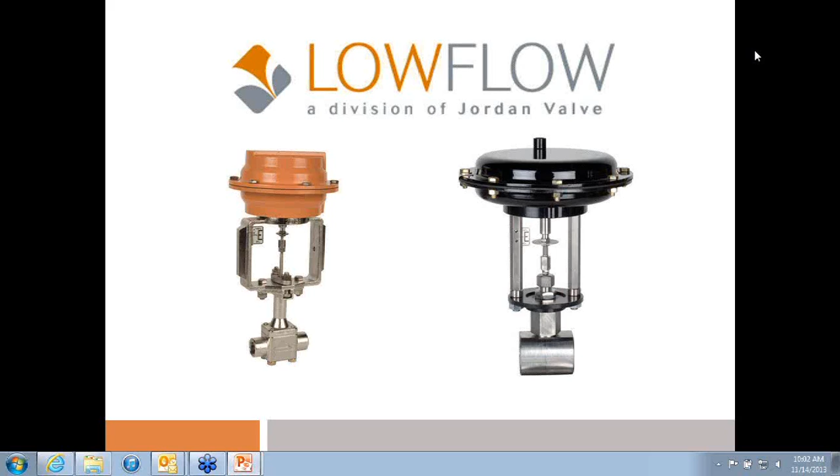Introduction to Control Valves for Low Flow Applications. Today's presenter is Tim Gaynor, Regional Sales Manager, and Harry Wepkenberg, Product Manager for Richards Industries, which owns Low Flow Control Valves. Their other brands include Jordan Valves, Marwin Valves, Hex Valves, SteriFlow, and Bestobell Steam Traps.

Tim has 19 years of experience in the industry, 16 of those years with Richards Industries companies. Harry joined Richards in 2008 and has been in the valve industry since 2002.

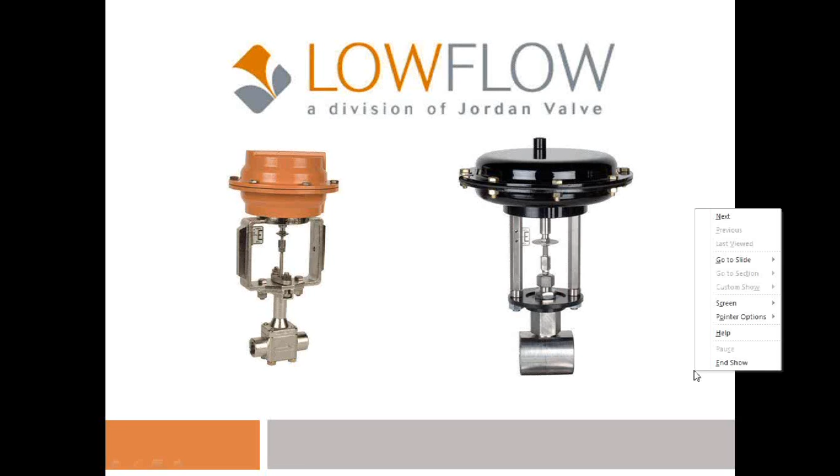Just quickly, we want to go over a few different things, all of it pertaining to fractional or low-flow controls. On the agenda, fractional flow scope, kind of want to define the marketplace, and then we'll lead into some prevalent applications that we see. And that'll include a pretty diverse group of industries, and hopefully there'll be applications that are pertinent to each and every one of you.

And then we'll go into some of the typical control valve design options that are out there in the market. And then we'll talk about some sizing and selection considerations that might help you out for these applications. And then we'll go a little bit beyond control valves and talk about some other products that may be applicable. And then lastly, we'll just offer some valve selection tips.

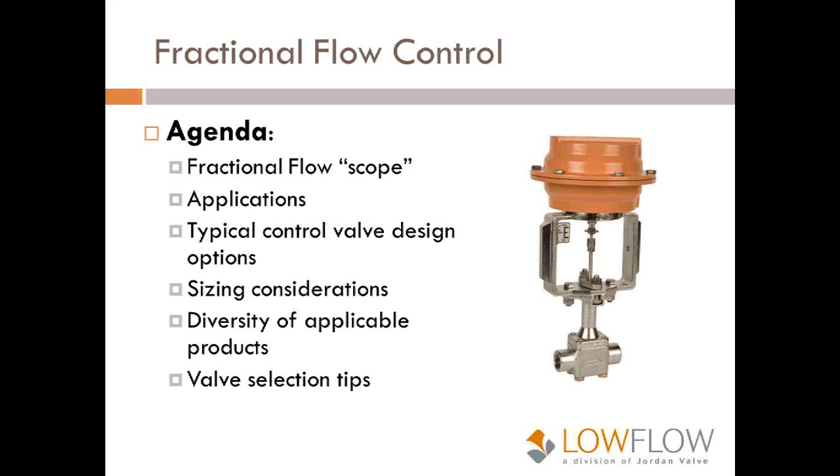Application scope, what we see as being the commonality or common denominator with all these is a small volume of some kind of product, liquid, gas, whatever it might be, that is being controlled, and the control requirements are for a high level of accuracy. And that's probably the most generic definition that I can give. And that may conjure up specific images, small products, pretty mundane applications. But within that scope, there's a lot of variety.

For instance, if you look at temperatures, we see applications that run from cryogenic to temperatures over 1,000 degrees. And then within pressure, we see applications that are from vacuum to over 10,000 psi. And then the actual valves themselves, you can have your basic steels and stainless steels, but we see a lot of applications that require exotic alloys, whether it's due to chemical compatibilities or temperatures as listed above. So definitely some common things there with small amounts of flow, but there's certainly a lot of different applications within that definition.

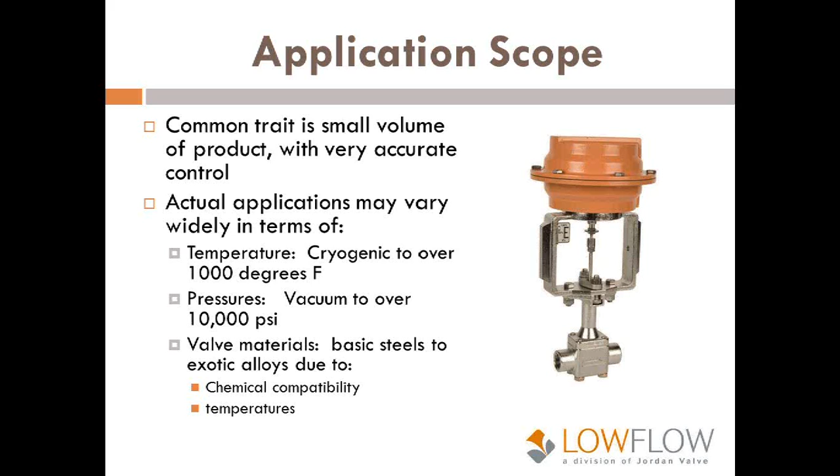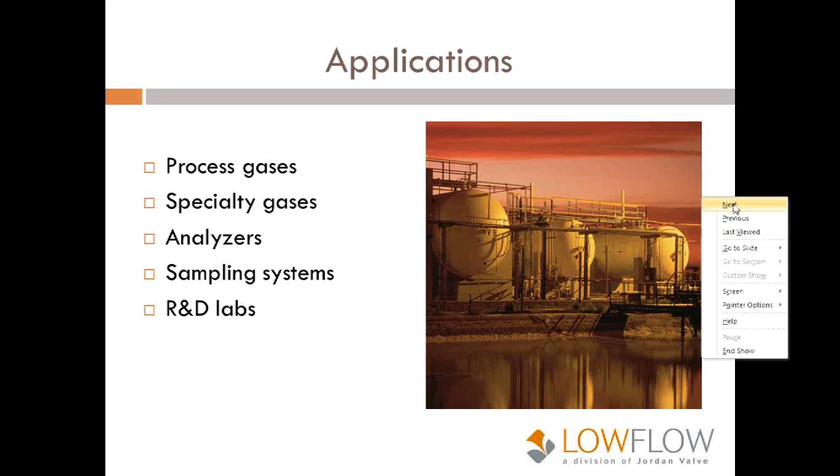First, I'm going to talk about some generic applications that we see, and we'll see this across a variety of industries. A lot of process and specialty gas applications, a lot of analyzer applications, a lot of sampling systems, R&D labs, that type of thing. And I want to segue that into some specifics. A couple of big markets that we see are pilot plants. A lot of the business that ourselves and other manufacturers see revolve around pilot plants.

And these can range from just a small skid, as many of you have no doubt seen, all the way up to multi-room, depending on what they're trying to do. And what these typically have in common is you've got an existing process that a client wants to improve, or you have a new process idea and you want to validate that. The idea here is to build a small-scale version, prove that technology or validate that improvement, and then scale it up to large scale. So you save a lot of money by going with the pilot plant. And this is where your smaller valves, your lower flows come into play. Within the pilot plants, we see a lot of applications for acid injection, chemical dosing, and general metering.

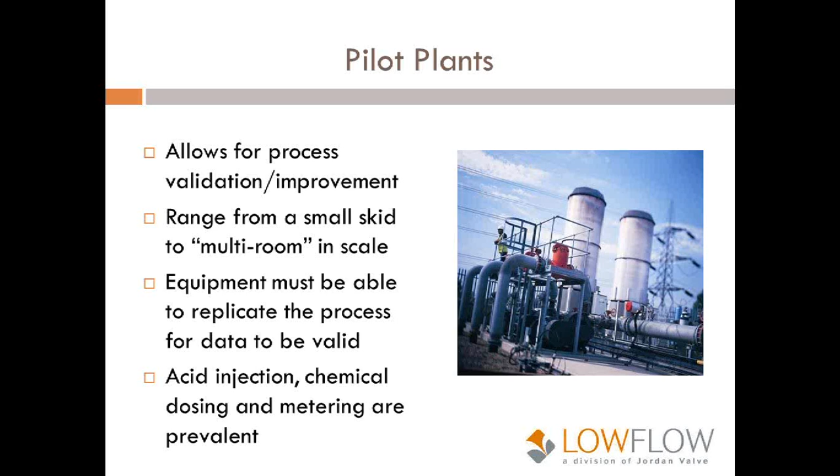Another very prevalent industry is water treatment. This can be water treatment or wastewater treatment, and this can be standalone actual water treatment plants. But we also see a lot of these applications at refineries or chemical plants where they do their own water treatment, even if it's just to treat water before it goes to drain.

A lot of the applications we see revolve around pH control. We see a lot of sulfuric acid applications, typically requiring Alloy 20 material. We see a lot of caustics. We see sodium hypochlorites, usually you'll see Hastelloy C, and that's disinfectant, so that's going to be on the water treatment side.

But one thing of note that we see in these industries is a lot of the configurations have electric actuators as opposed to pneumatics, and that's just driven by the fact that a lot of these plants or treatment facilities are pretty big, and so they don't necessarily have air at their disposal to power pneumatic valves.

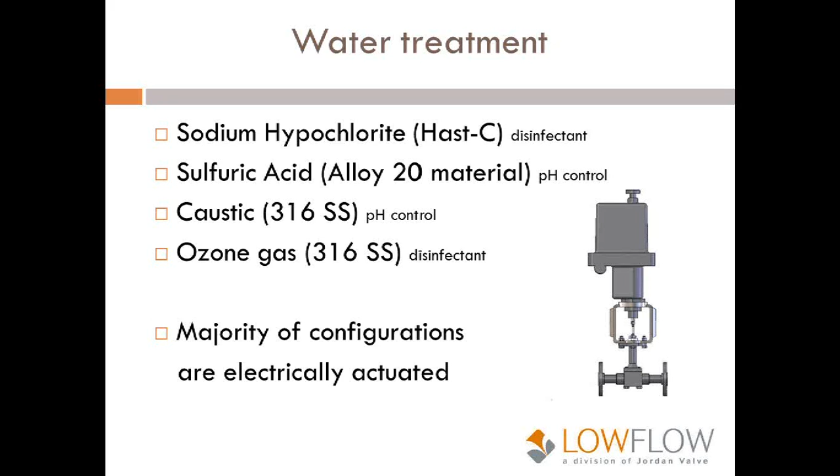Some of the other applications, and the idea here on this slide and the next one is to cover a lot of different technologies, a lot of different manufacturing and process applications, so that hopefully something will make sense to each of the attendees. We do a lot of corrosion prevention in petrochemical and oil and gas. We do subsea. Ammonia injection skids is a big application for pollution controls.

Uranium enrichment, air separation. Again, cryogenic was mentioned earlier, and it can be gasification. There's applications for that where you're taking liquid natural gas and expanding it out to actual gas, or freeze drying. We do a lot in the food industry with these types of applications. Helium gas, heavy water, chromatography skids is a big industry for these types of products. Hydrogen control and fuel cells. Carbon dioxide, again, pH control.

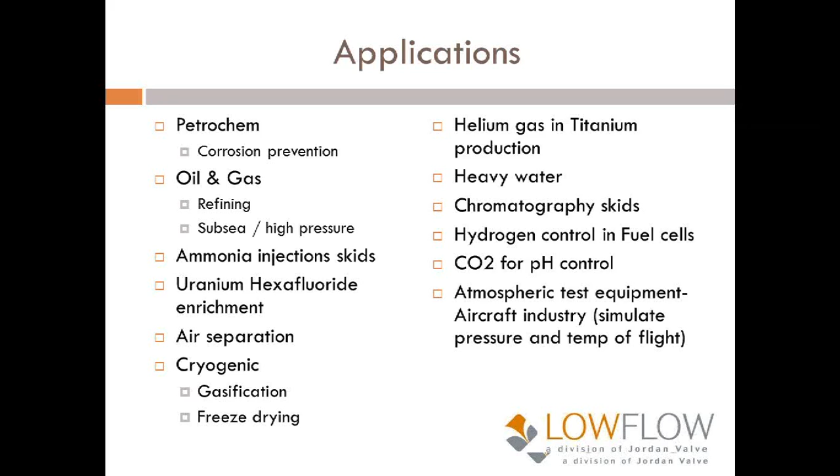Also atmospheric test equipment for the aircraft industry, and that's kind of an interesting one where they'll use these types of products to basically replicate flight, changing pressures and changing temperatures to test various aircraft equipment. Reactor pressure relief valves.

Humidification skids, and this can be in actual industrial where you need humidification going to a turbine, for example, or it can be as simple as climate controls in storage areas, maintenance shops, things like that. So very diverse applications there. Automotive test stand applications, typically tied to emission controls and engine component life testing.

Bellows sealed versions is a very prevalent application where you've got some type of process that can't be leaked out. Hydrogen obviously is listed, and you don't want that getting out of the valve. So bellows sealed applications. Steam pressure. Again, a lot of people, when they think of low flow or fractional flow applications, will kind of pigeonhole it as small amounts of process and not really tough applications, but there's a lot of applications for steam control with these types of products also.

Hot oil skids, and then within the biopharm industry, there's also applications. I don't want to get into too much detail, obviously, but reactor sterilizers and things along those lines. Again, the idea with those two slides is hopefully there will be some application that's germane to each of you.

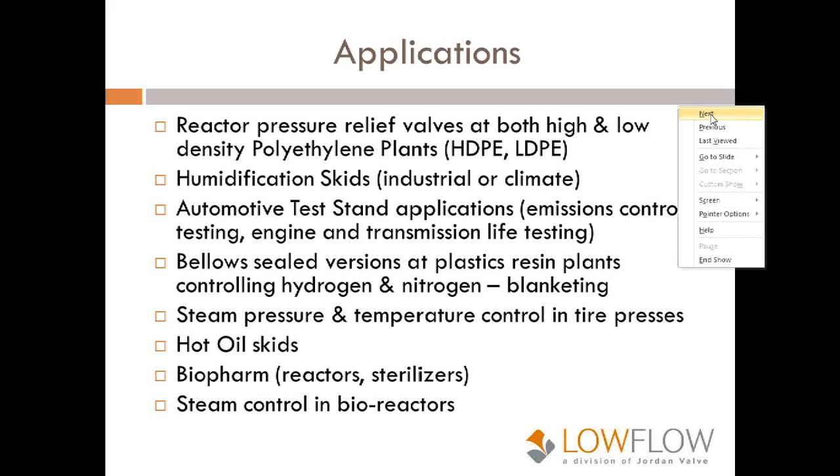There's a lot of different manufacturers of fractional flow products, and within the industry you'll see a lot of options. Most of the applications are addressed with control valves, and I'm just going to run through some of the commercially available options that are out there. And the idea here is, maybe you've had some applications and you've used standard control valves for them. This is just to give you an idea of what's out there, what's commercially available. Maybe some of this will stick.

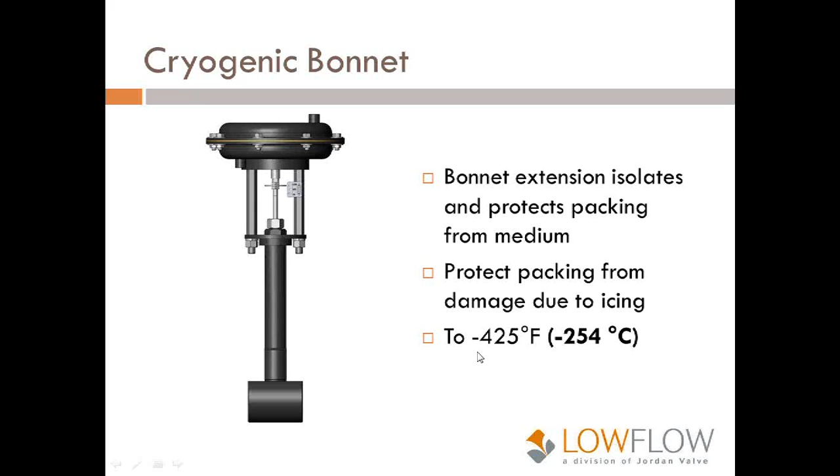Cryogenic bonnets. Again, we mentioned earlier gasification. We mentioned freeze drying, and all this does is isolate the packing up in here so that if you get an ice ball on the actual valve, it won't freeze the stem and bind it within the packing, so that the valve will still modulate. And you see this, typically, industry-wide, down into the -425 range is very prevalent.

Bellows stem seal, which we touched on a little bit earlier. So you've got an actual bellows in here, and the idea is zero leakage. And as I mentioned hydrogen earlier, but there's a lot of different chemicals, a lot of different gases that can't be released to the atmosphere, and this prevents that.

Most manufacturers do have some type of leak detection port also. So then in the event of a bellows failure, you'll have a backup packing, and that leak detection port tells you that there's an issue. Again, I think just about anybody in the industry has that as an option.

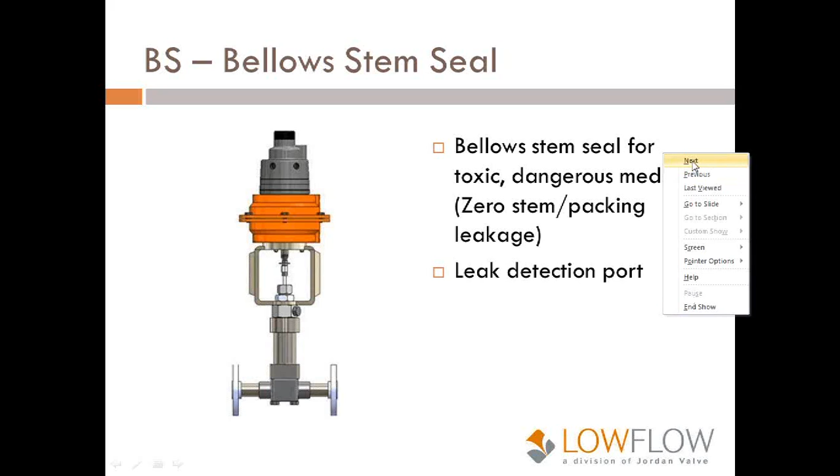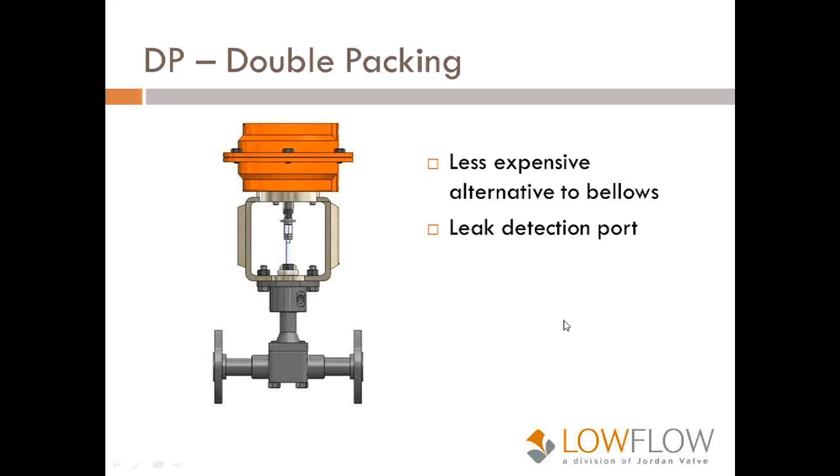A less expensive alternative that's commercially available to the bellows is a double packing. Bellows can be expensive. Double packing puts a packing above and below the leak detection port. And again, same thing here. You've got two barriers essentially that your gas or your fluid would need to go through before you had any stem leakage or anything along those lines.

High temperature. There are a couple of different ways that manufacturers will deal with this. Sometimes it's an extension, again, to get the packing away from it, and then some manufacturers also have a fin bonnet. It's just a simple heat sink that I'm sure all of you are familiar with.

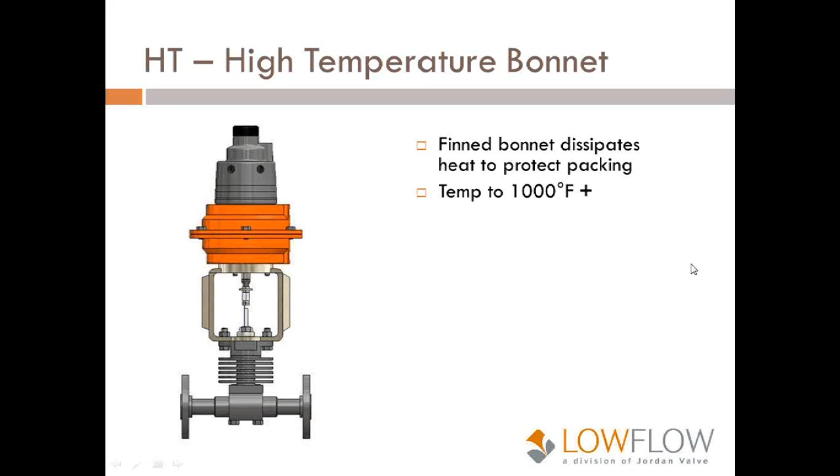But again, the idea here is to think about these products as more than just kind of a generic niche kind of thing, because you can apply these onto applications that even go above 1,000 degrees F. Graphite packing is obviously used at that point, and most of the manufacturers out there will recommend the use of a positioner at that point because graphite packing can bind on the stem a little bit more than a Teflon packing.

Another commercially available product is thermoplastics. A lot of times, depending on chemical compatibility, this can be a lower cost alternative to an alloy, a Hastelloy C or an alloy 20 or something along those lines. So again, commercially available out there, a couple of different types of thermoplastics. Pressures are obviously a lot lower, but you can get these with all wetted parts out of like a PVC or a Kynar even. So again, a nice alternative depending on cost, your price points, and depending upon pressures.

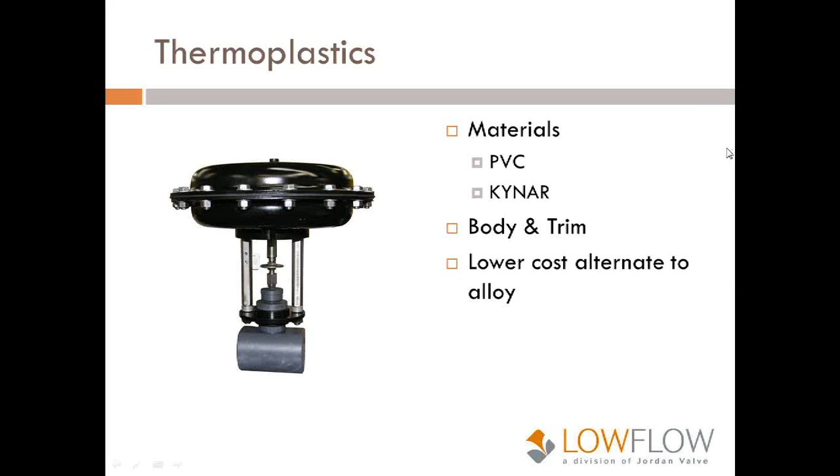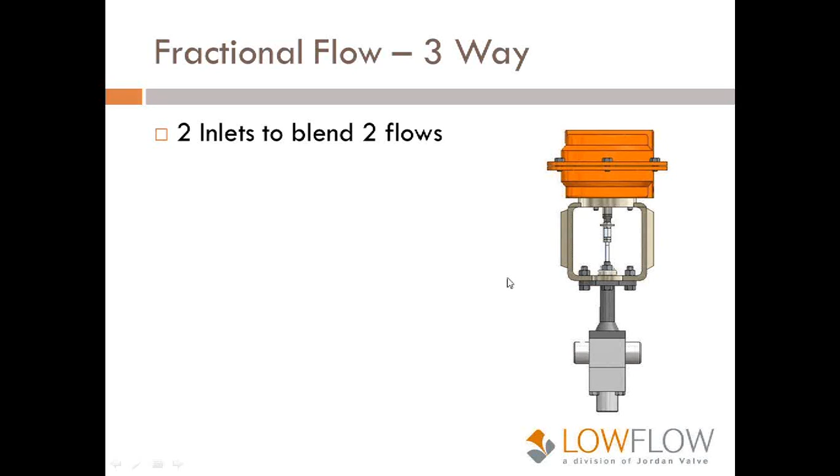And also three-way, so if you had two different materials that you're blending, you can have a couple of inlets and a single outlet in order to make that happen. Again, fractional flow applications, so small amounts of flow through the valve.

One of the important things with any of these type of applications is accuracy. Again, we're talking about metering or dosing small amounts of something into a larger product or a larger vessel or into a flow stream. And one way to enhance the accuracy of any of the control valves, and this is offered by any manufacturer of these type of products, would be a positioner. And all this does is it has some type of linkage or reference to the stem, and it compares the stem position to the input signal, and then it can add or take air out of the actuator to make any necessary corrections.

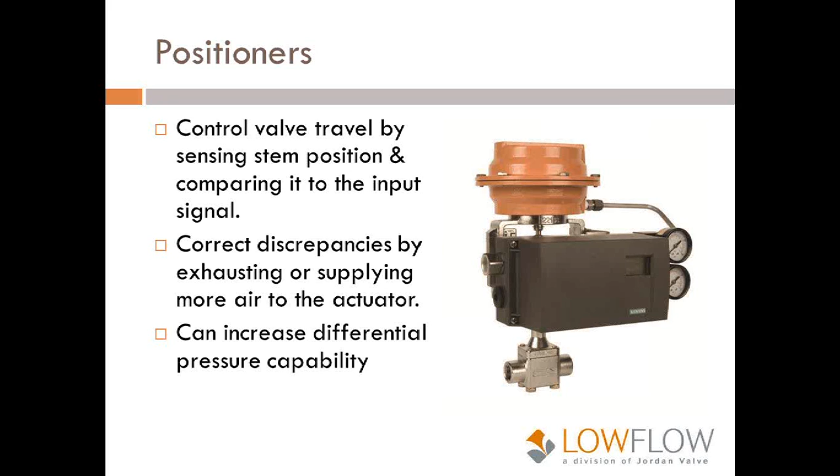So you get two things essentially out of the positioner. Typically you're going to get more accuracy, and secondly it can increase the differential pressure capability because it has the option of adding more air in order to push or locate the plug in the right spot based on the input signal. So again, accuracy is a big key here, and this is one step that most manufacturers offer to enhance that.

And we briefly touched on electric actuators when we were talking about water treatment, but again, this is another way that you can make the valves more accurate. It doesn't require pneumatics, which is a nice bonus, but typically your electric actuators are more expensive than pneumatics, but they're also more accurate. So it kind of comes down to your preference and your need for accuracy, and most people will have a good feel for that, and they'll know whether they can get by with a straight pneumatic, or whether they need pneumatic with a positioner, or whether they need to make the step up to an electric actuator.

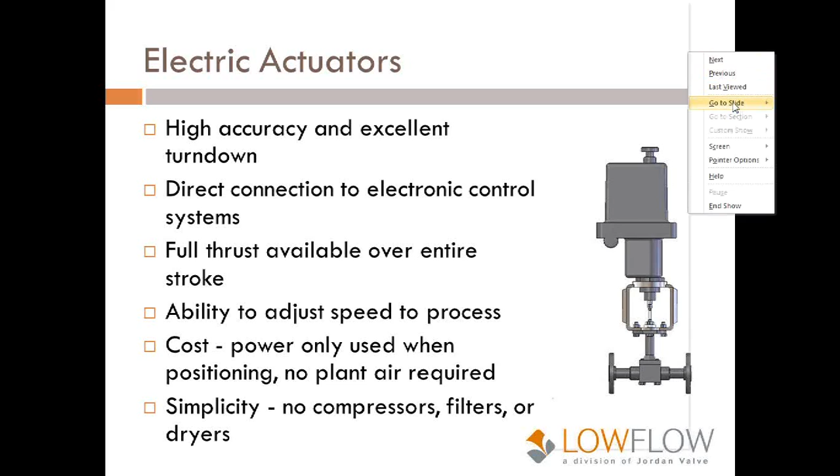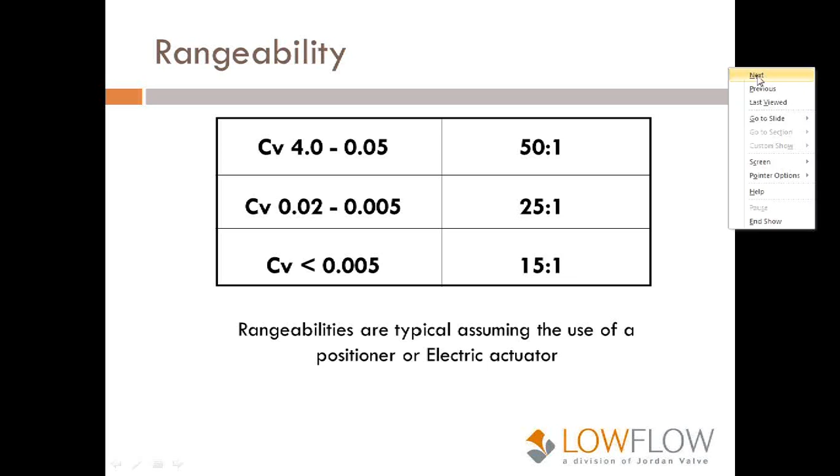Some sizing considerations, and this is talking about picking the right orifice, the right plug, in order to make sure that you actually get the control that you're looking for. Low flow products have their own flow characteristics, and this typically occurs when you get into lower CVs. What we found is in liquids, when you get below 0.2, and in gases 0.05, they're no longer turbulent; they're laminar at that point. And I've got a little picture on the next slide to give you a graphic illustration of that.

But what happens is when you get into the smaller sizes, the velocity at the center of the pipe or the valve is moving through there faster than what's on the outside. So it can be twice as fast, and this impacts the amount of flow that you're capable of moving through a valve.

So at this point, the flow can be changing from turbulent to laminar. So now your CV is no longer a constant anymore. Now, typical sizing programs will assume a turbulent flow, and this will give you some bad calculations at times, depending on the fluids and the CVs that are involved.

So the broad picture here is there are commercially available sizing programs. We have one, obviously, but you want to make sure that when you size these types of applications that you're using a low flow, a fractional flow type of sizing program, because they will compensate for any transitional or laminar flow.

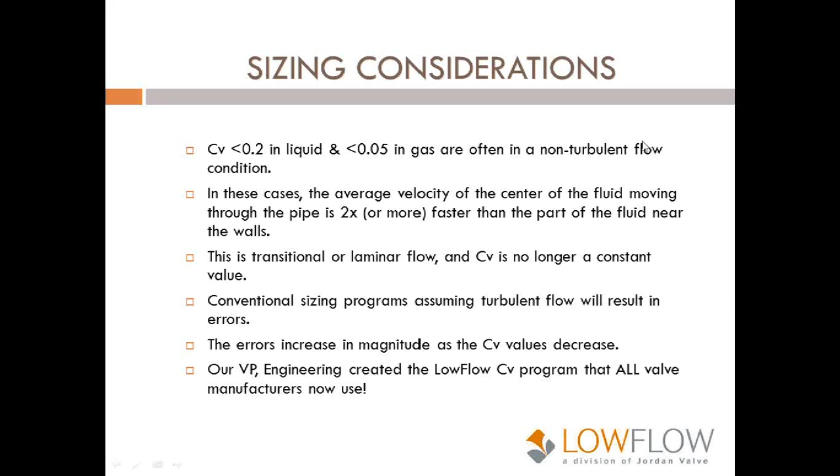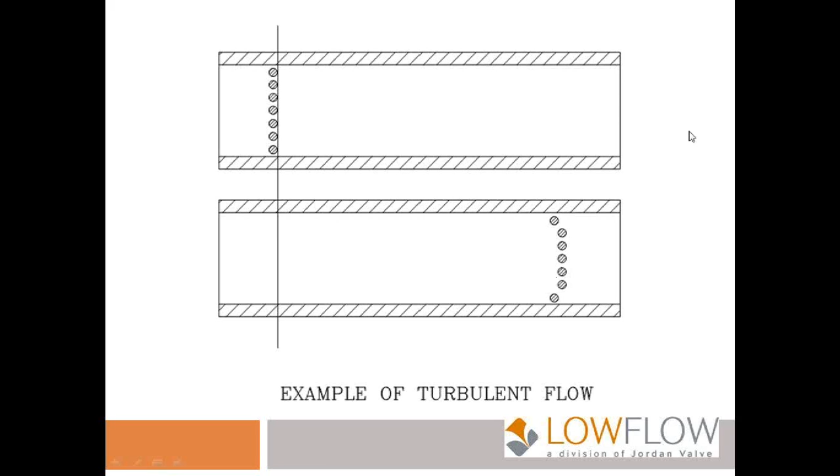Here's a picture of turbulent flow. Typical flow through, if you had the molecules, you had your fluid going through, they're all going to move at the same speed through the pipe. When you get into the smaller pipe sizes, the center will go through faster. And again, that's what we're talking about. Now, it may not sound like a big deal, that, okay, a little bit of the fluid's moving faster. But again, we're talking about high accuracy applications. And knowing that the center can be moving twice as fast is critical.

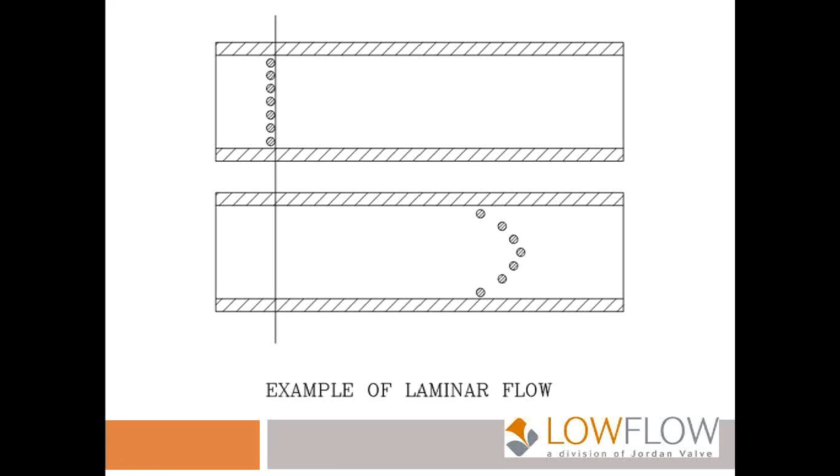And again, you don't want to have the wrong CV, because you may not get the performance that you're looking for. You may not get the flow that you require. And you may not get the turndown that you need either. So it's very critical to make sure that you use the right sizing program.

And just to reinforce that point, here's a representative chart of commercially available CVs. So again, starting at 4, you can see that you can get CVs down into the 0.00001. So again, that's why it's so important that you use the right program, because it'll help you select the right CVs. The difference between a 0.02 and a 0.01 may not be a whole lot in terms of flow, but one's double the other. So picking the right one is going to be very important.

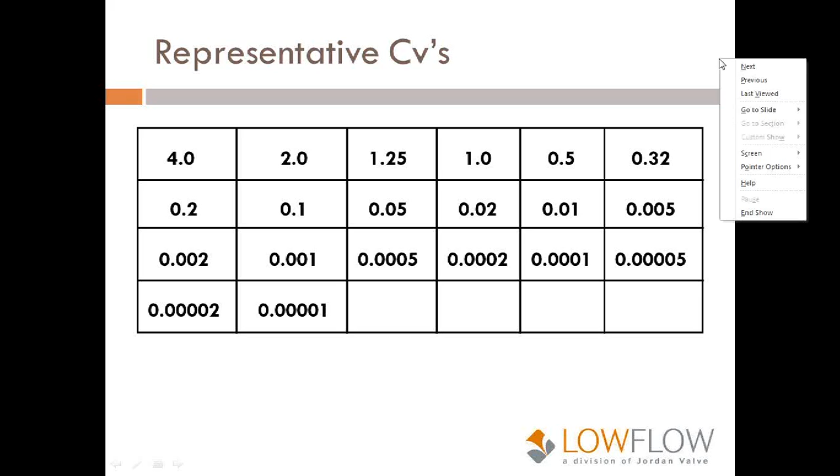But it's nice to know you can do that in a mechanical product, and if that meets your accuracy needs, it's going to be a lot less costly than a control valve and a control loop and a pressure transmitter and all those type of things. Typical bar stock construction is available from just about anybody in the marketplace, and so that way you can get alloys and things like that also, depending on your compatibility needs.

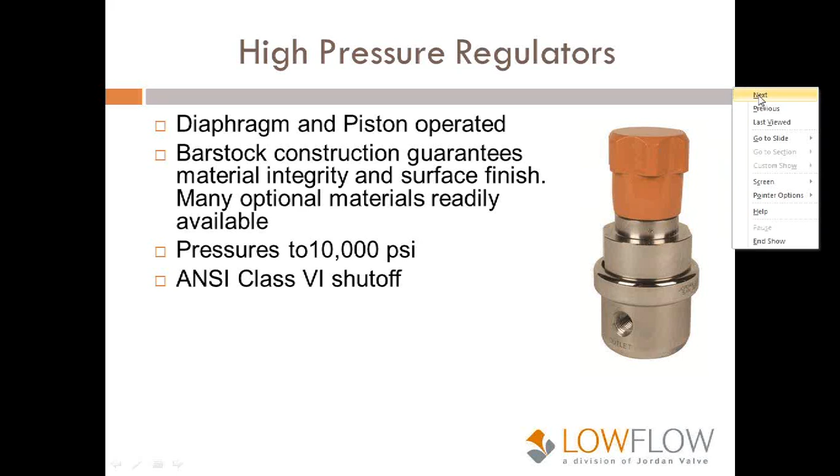And there's also back pressure versions of it where it's a normally closed product and you're controlling the inlet pressure. So if it reaches a certain point, the valve opens and bleeds off the pressure. Again, whether it's a liquid, gas, whatever it might be. Again, you can get into the thousands of PSI. Bar stock is the most prevalent type of material used, so you can get alloys and things along those lines. Again, mechanical approach to some of the same applications.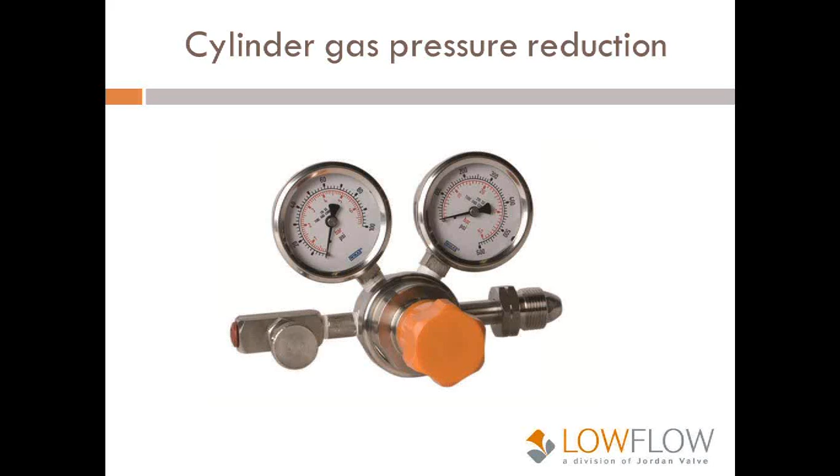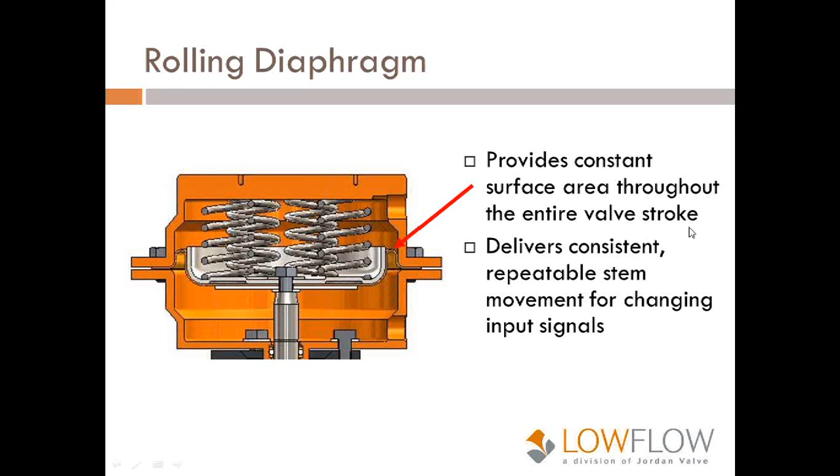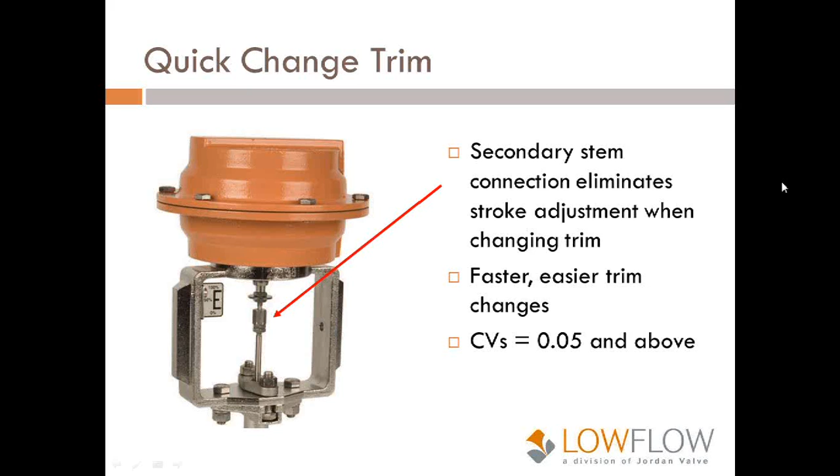And to some of you, this may not be a big deal at all. You'll purchase a product and put it in, and it's going to be the same application over and over. But this is very prevalent in lab, R&D, and pilot plant applications where they're constantly changing flow requirements, applications, and things like that. And what this does is allow you to use the same valve for a lot of different applications simply by changing the trim. So therefore, you're saving a lot of money.

And what's helpful in those applications is a bolted type of bonnet also. So if you have to change the CV, you have to change the flow characteristic, or you're just doing maintenance, a bolted bonnet will allow you to leave the body in line so you don't have to break down your actual process line. We've already talked about changing the plug, and then most manufacturers offer a removable seat.

This particular one is threaded and actually comes out with your Craftsman deep well socket. So it's very easy to change the seat and plug to change, again, CV, flow characteristic, or if you're just doing general maintenance.

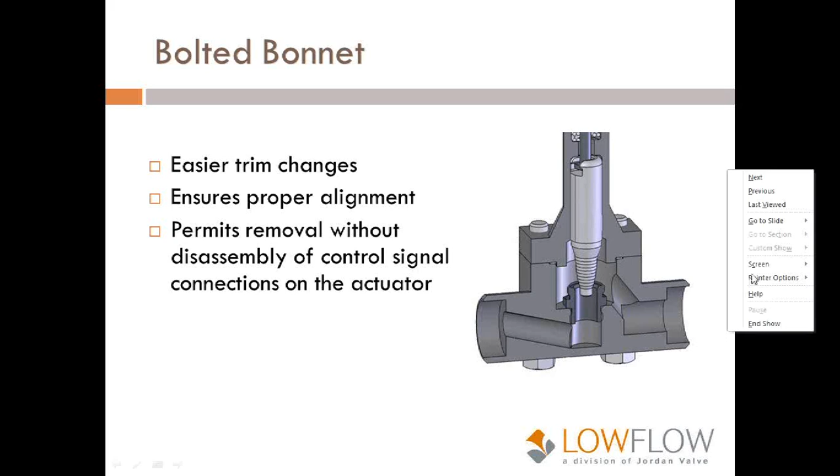Questions? Oh, that's not what I wanted. Tim, I don't have any questions at this point. Okay. I think what we could do is start to wrap up a little bit, and if a question comes in, we'll go ahead and get it answered.